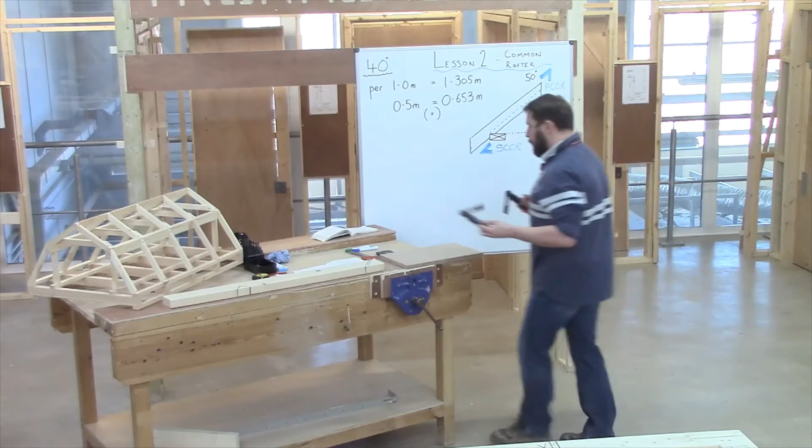So, what I've done, I'm fortunate to have two sliding bevels. I've used a protractor to form a 40 and a 50 degree angle, and I've kept that onto just a nice piece of ply or MDF, just in case I was on the top of a roof and I dropped my bevel, I've still got a reference point there. You'll also notice in pen, I've labelled them, okay. Also, you can put a bit of masking tape around there. Once you're doing that, it just shows a bit of competency. It shows you know what we're talking about.

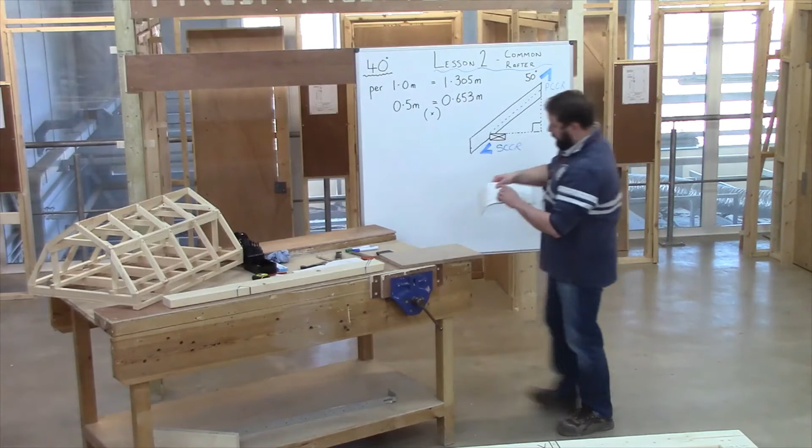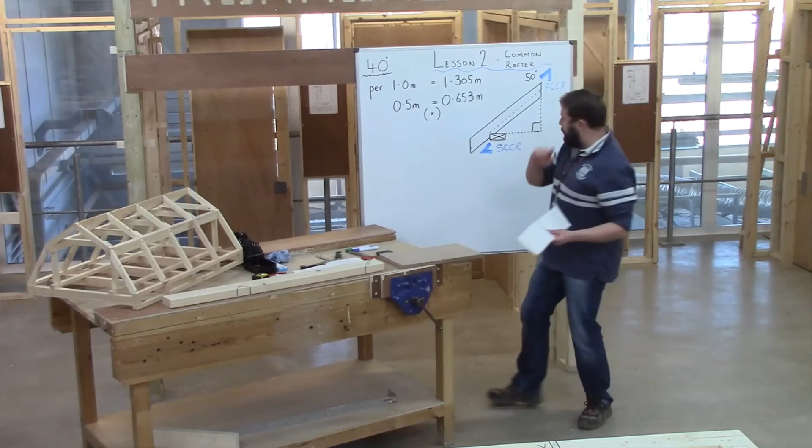So, I've got my ready reckoner, I've got my two sliding bevels, and I've set them on my bevel board. So, where do we go from there? We need to know this distance here, which is our pitch line. We'll convert back to the ready reckoner, and what that ready reckoner tells us is on the 40 degree pitch, for every metre of run, Pete, remind me again, what's the run? Half the span. Half the span, good. So for every metre of run, this pitch line is going to be 1.305. Okay? So for example, if we had 10 metres of run, we'd need to multiply that figure by 10. 20, multiply by 20. 100, multiply by 100. I think you're going to get the picture.

Okay? We've worked out our run, looking back at our wall plate, is 500 millimetres, so half a metre. We still need to multiply it by that number. Don't fall in the trap of thinking because it's below a metre, we need to divide it. We don't. It's still a multiplication. And what you've noticed as well is I'm making sure I'm working in the same unit all the time. Don't start adding millimetres to metres, getting them confused. So it's always a multiplication. You always need to transfer it into metres. We've got that figure. What do we do with that next step?

So, I've got my piece of timber. The very first check I'm going to make, I'm going to check it for bow. See if it's got a camber. Okay? If it has, I want to make sure that camber is facing up, so that when that roof's loaded out with tiles and battens over time, it'll sort of flatten out. So that's my first port of call. From there, I'm going to find my plumb cut, and I'm going to mark that onto the top of there on that blue line that you can see. I'm going to talk about the second line in a minute, but just focus on that top line.

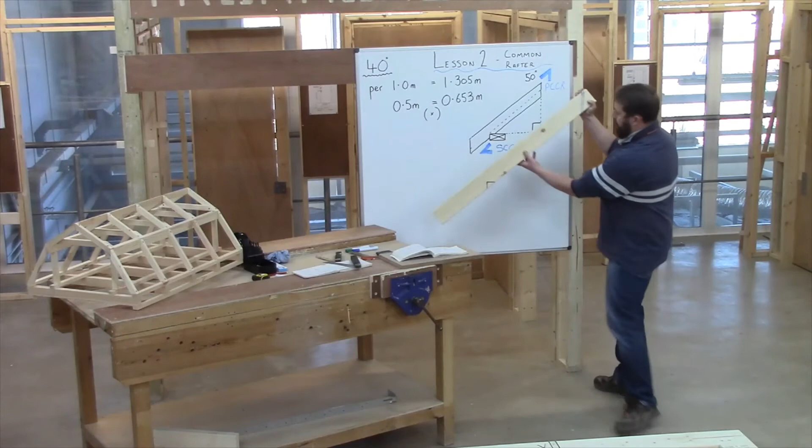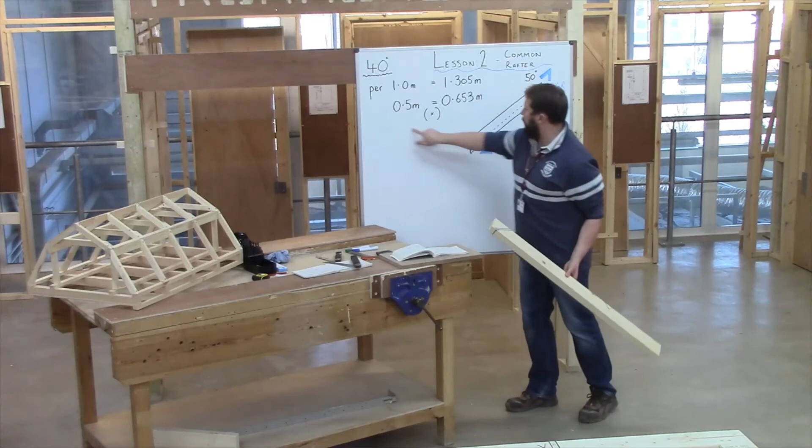And then what you'll notice is you've got a dotted line that is sort of somewhere in the width of that timber. Okay? Building regs state that when we look at taking out a bird's mouth, we cannot take out any more than a third of the width of the timber. So what I've done, I've measured the width, divided by 3, and I'll set a combination square to that. So, as we're looking at it, I now know that distance from there to there is that distance from there to there, which is that calculation there. So, it's 653 millimetres. Transferred that down.

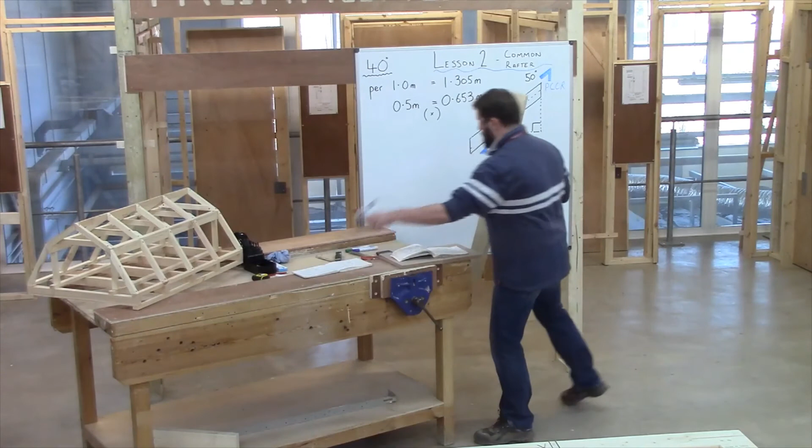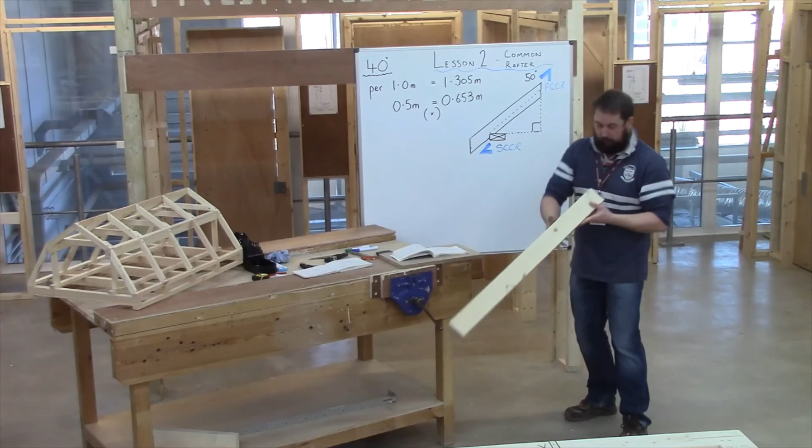My plumb cut, I've continued down from the top, which is the blue line, so the angle stays the same. This is where my second sliding bevel comes in, and that is that seat cut. That will then sit on top of that wall plate. So that angle inside there should be 90 degrees. What I'm going to do is square those lines down. Same at the top, and you still need to make one more alteration at the top.

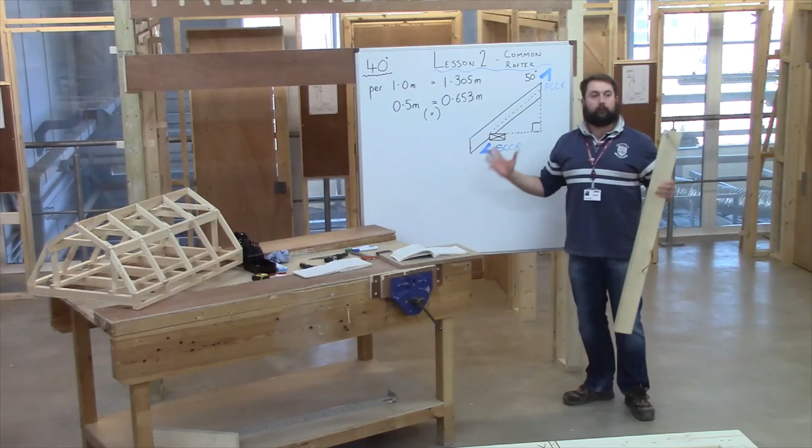What we'll have running through the centre of our roof is a ridge board. There's a spine to the roof, ties the roof together. Okay? I need to deduct half of that ridge board. For this exercise, we're going to use 18mm ply. Okay? So I've transferred across at a 90-degree line to that plumb cut, half of 18, so 9mm. This becomes my new cut line.

Okay? I've made a key point of squaring my lines down. I appreciate it's a roof and it's not a joinery product, but it's going to cause a lot of problems if, one, your plumb cut at the top isn't cut square, and if your bird's mouth also isn't cut square, your rafter isn't going to sit nice and neatly on